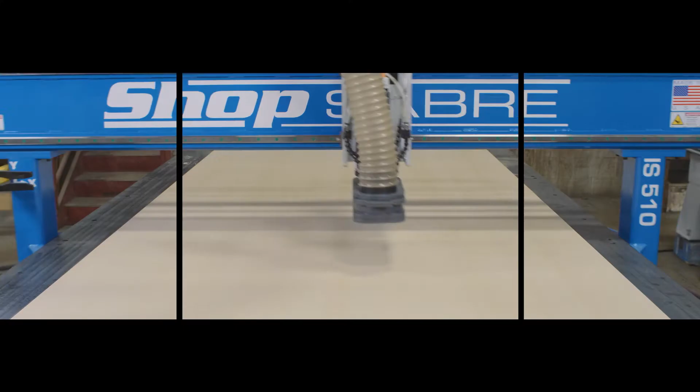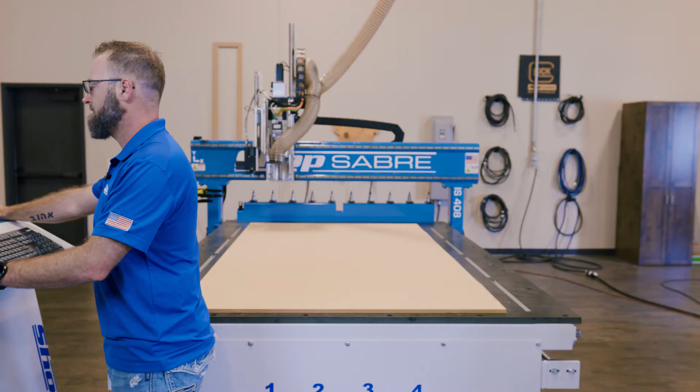Hey, Sean. Hey, Routerbob. This machine has a knife option. I'd really like to do a video showing what that does. You got any ideas? Well, we've cut dinosaurs out of 1/2-inch Baltic birch. What do you think about doing one out of foam? Well, that's a great idea. There's lots of curves, there's inside cuts. The knife's really good for that.

That 4x4 nest produces about the right size. We would only have to open the slots up a little bit. Yeah, well, I can get you the thickness of the material. Oh, well, let's get it done then.

Sounds good. We're going to be using an option that's referred to as a tangential knife. And let's talk about what the term tangential means, and then maybe you can understand what's going on here. All right. So to start with, here's a circle and a line. For a line to be tangent to a circle, it can touch at one and only one point. So in this instance here, that can't be tangent, it's not touching, and that can't be tangent because it's touching at 2 points. So there's only one position.

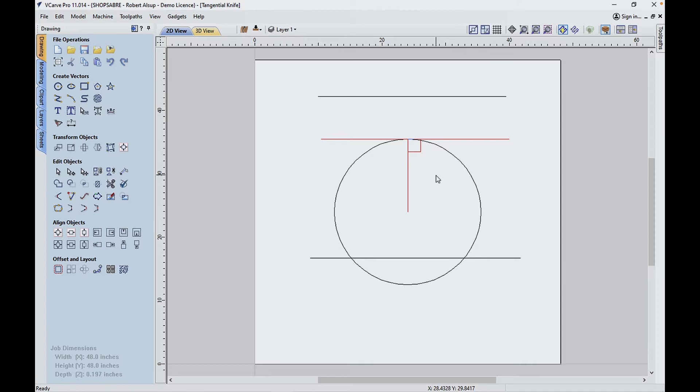And if I draw a line from that tangency point to the center of the circle, that forms a 90-degree angle. So that's what tangential means. Now, how does that relate to what we're doing? Now I've eliminated some of the geometry here. What this represents is the knife, and this would be the knife edge. So in this position, that edge is always at the tangency point. Now, as the geometry changes, the knife rotates to always maintain that relationship. That's what the tangential knife function does.

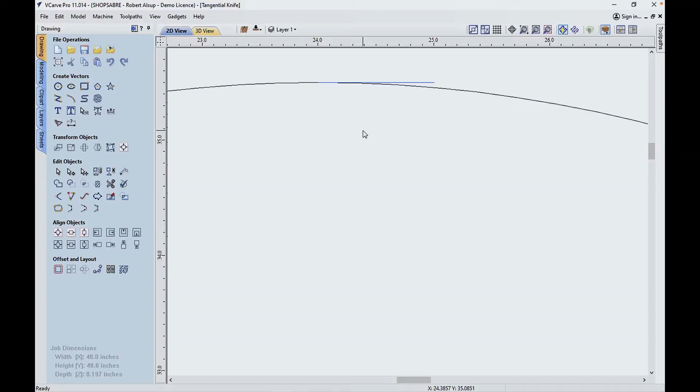Now, there's actually two versions of these tangential heads. One of them we'll be using today has a knife, and the knife is used in two methods. For one, depending on the material, the knife may just be rigid and it just may follow the shape around and cut the material. In our case, we're going to be cutting 3/4-inch styrofoam, so we need the knife to oscillate up and down. Then there's another head that actually has just a creasing roll, and that's primarily used for box making. Now, this is the actual 4x4 nest of our parts.

Before we get started on it, let's talk about how we set the knife tool up in VCarve. So we'll go to Tool Paths and we'll go to Tool Database. And I've selected knife, and it's an end mill. It doesn't really matter what diameter it is because we're going to be doing a center line cut. The RPMs don't matter. Feed rate does matter. We're going to be cutting at 150 inches a minute. And once again, that's determined by the material. And sometimes you just have to do sample cuts. All right, so we'll close that.

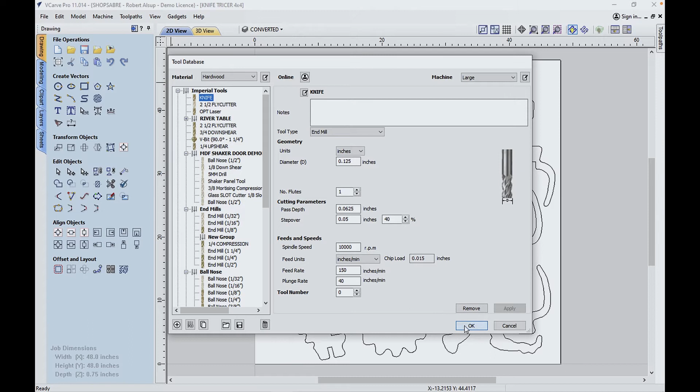All right, this is a nest. This is 4 feet by 4 feet. This produces the right size dinosaur. But the original nest was created for 1/2-inch material, so I have to convert the width of the slots to 0.75 because that's the width of our foam. Now, all of them are done, but I left one to show you how you do it. Now, if it's just a minor change, sometimes you can scale it till it's right, but in our case, it's too much of a change.

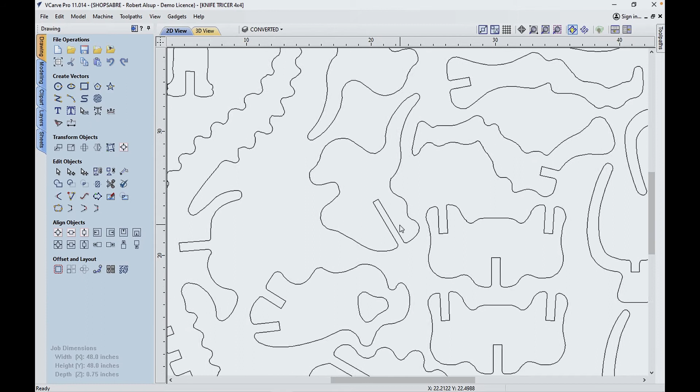So here's how I do that in VCarve Pro. I start with, there's the part. It's all connected. It's one unit. Now, let's start over here. Let's draw a line, and just anywhere out like this. Angle doesn't matter. Okay, then we'll come over here, and we'll use the trim tool. We'll trim the ends. And what I want to do is establish a straight line.

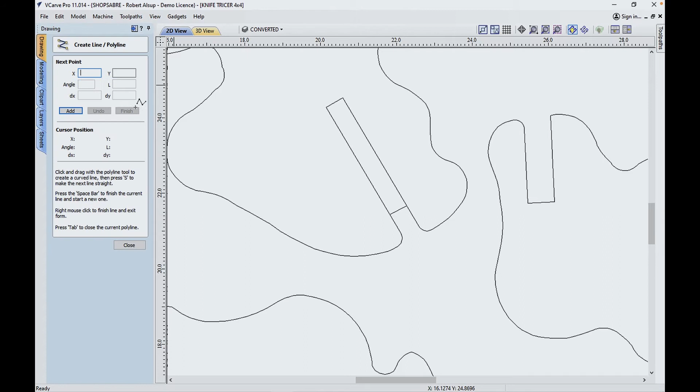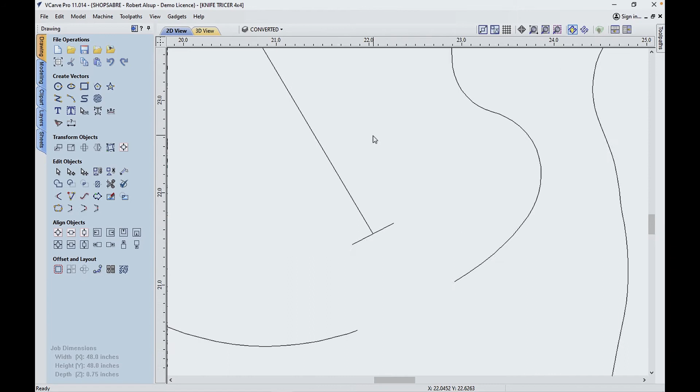There's a natural midpoint here, and there's a natural midpoint here. All right? Then once I get that done, I select this, hit the node editor. Then I come out here, and what I really want to do is, if I hover over that and hit C, that's going to cut that line here, and I want to cut it probably right here. All right? When that cuts those, then I can delete that. So that gets rid of the old geometry, and I've got enough information here now to rebuild it.

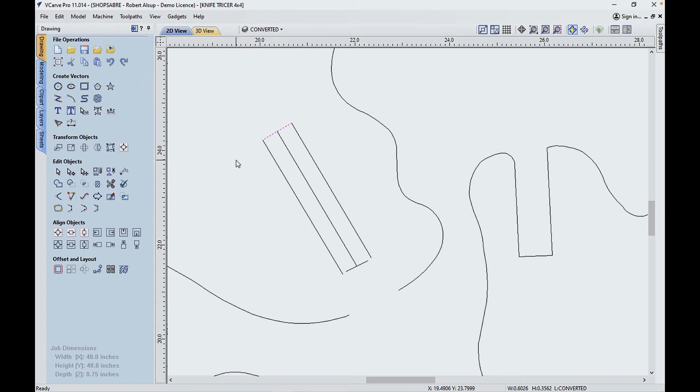So I'm going to take this line, I'm going to offset it. I like to let VCarve do the math. So the material thickness is 0.75, but I need half of that, divided by 2 and hit equal, and it calculates it for me, and hit offset. And there's my new width. Okay, we're going to connect this from here to here. That's the end of it. All right, that looks good. Now let's get rid of what we don't need. We don't need those anymore.

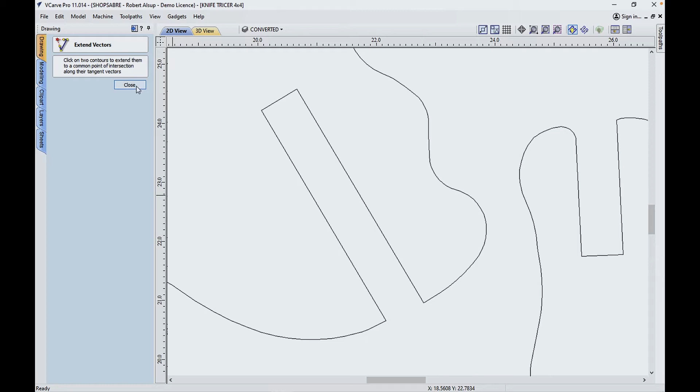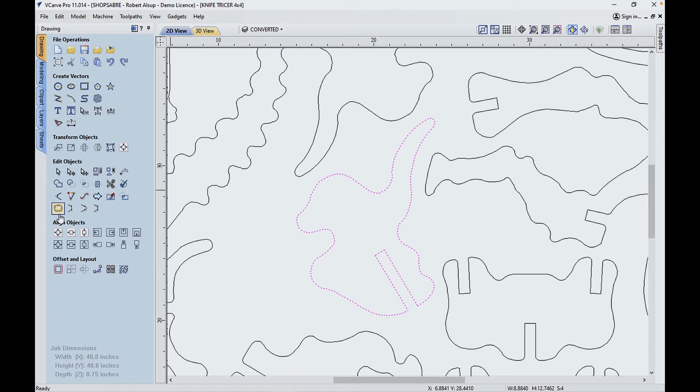And finally, here's the tricky part, is extending this. Now, you select this and be real careful when you pick that geometry, and you see it'll fix it right here. And there you go. So what that did was actually it extended both of them until they form a corner. Right now, I want to select those and make sure they're all joined together. So I've selected them all. I hit the join tool. What I'm looking for is everything is one closed geometry.

Okay, and then the last thing I need to do is to put these radiuses, and you use the radius tool. The fillet will be 0.25. Move that over till you see the check mark. Move that over till you see the check mark. And that's how I modify the geometry.

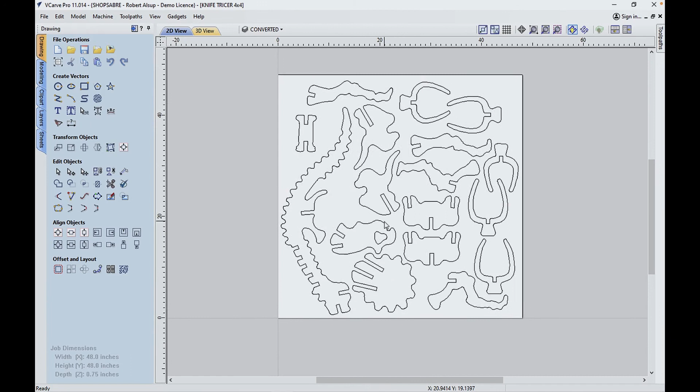I want to show you a little tip here sometimes on setting tool depth. Now, when you're using the knife, you always set the depth at the material thickness. Let me show you how you get there. Sometimes you have weird material thicknesses. If you put in Z, which is a variable for thickness, and equal, VCarve Pro calculates that for you. So that's a nice little tip. And because of the way the tool is set up, let's get rid of these. We just really need one pass on this.

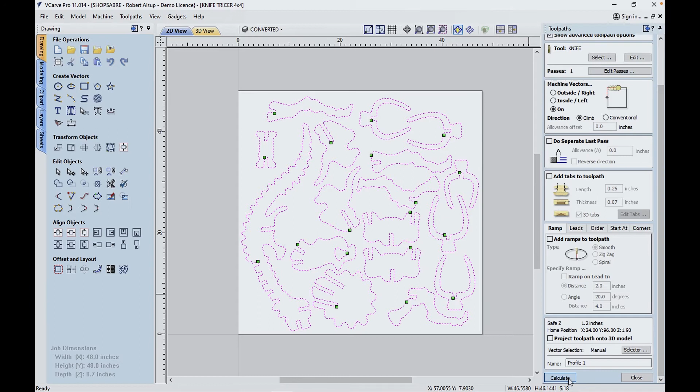All right, so now that looks pretty good. Nothing else is really required. We hit calculate, and there's our tool path. And let's zoom in on this a little bit. And when we run simulation, we should see it. And there they are. That looks great. So we validated the geometry in the tool path with simulation. Perfect. We've completed our tool paths. Everything looks good in simulation. Let's send these files out to CNC Sean, and let's cut out a Styrofoam Triceratops.

All right, I got the file from Routerbob. This is going to be really straightforward, real easy to do. We're only going to need one tool. It's an E25 solid carbide knife blade from Ecocam. We're going to cut 3/4 inch foam. This is a 1-inch blade. It's going to work great. All we got to do now is get started.

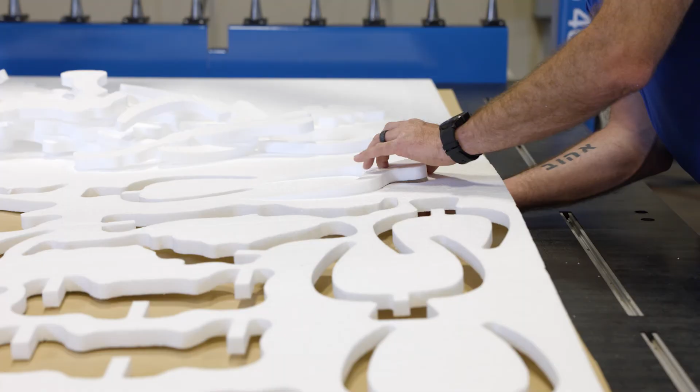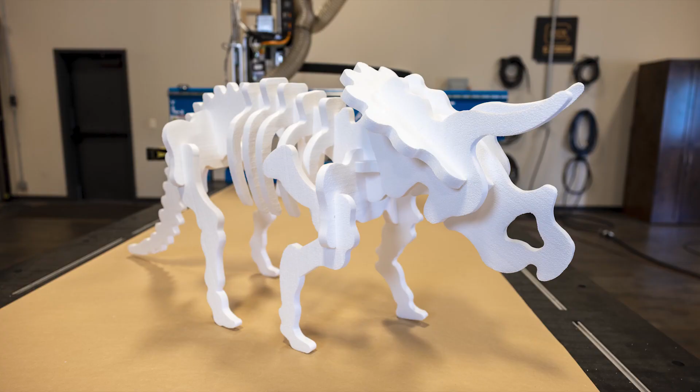Sean, how did the Triceratops come out? Tell you what, Routerbob, I'm really impressed with that knife. It cut really smooth. We've got some tight radius corners up here. They look great. Nice sharp inside corners. Pretty impressed. That was really a good choice for a product, but you know what impresses me the most? How little adding that capability to your CNC router costs. Yeah, and it opens up the possibilities to cut a lot more material.